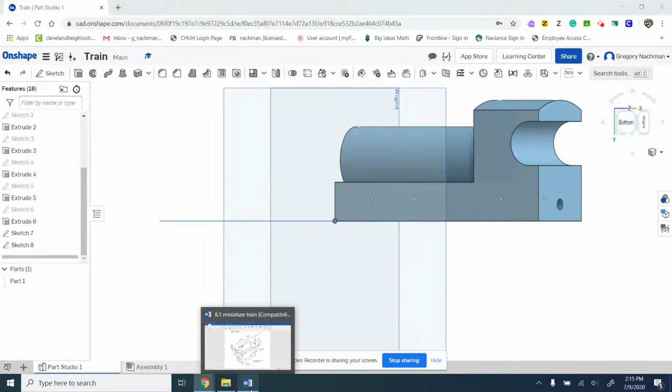This is our third and I believe final video, hopefully if we make it in, of the train body. And what we're going to do is we're going to make the holes.

So there's holes here, and we're going to use the hole feature, and it tells us how big that hole is. 1/4 UNC is the screw type, and it's a threaded screw. So you'll be able to actually put an actual screw in there. It's not just a normal hole.

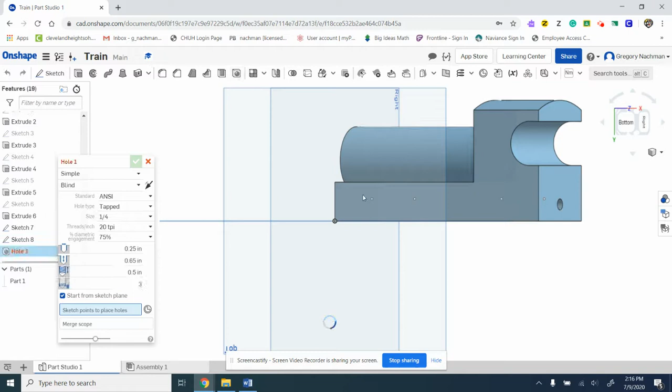So what we're going to do is we're going to use the hole feature, and we're going to click on the 4 parts that we want. And it's nice because if you look next to the cursor, it tells you how many. So there's 4 of them, right?

And we're going to look, it says 1/4 20 UNC. So 1/4 is the size, the diameter of that circle. 20 is how many threads per inch.

And it says in here that we want it to be 0.875 times 4. Times 4 means for all 4 of them, you don't actually multiply it by 4. And if we look, it tells you all those things, right? Like that's how big it is, right?

And it automatically sets it to what we want. Like if you choose a number 6 screw, it'll change the size automatically. So it's really nice, it's a nice feature. We want it 1/4 and the 20.

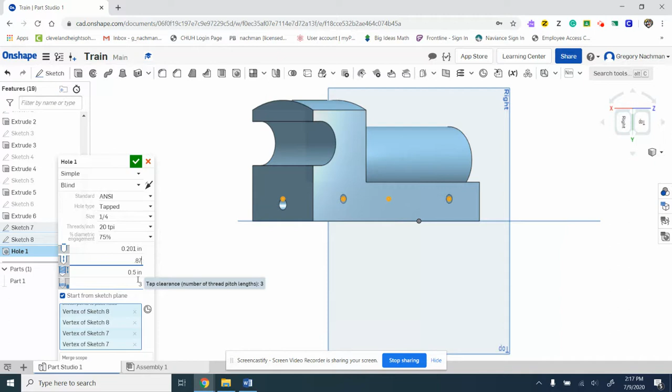And the total depth from there is 0.875. 0.875.

And it gives you the recommended, it automatically fills it in for you. So it's nice. You're able to put it in there, right? We can see all this stuff.

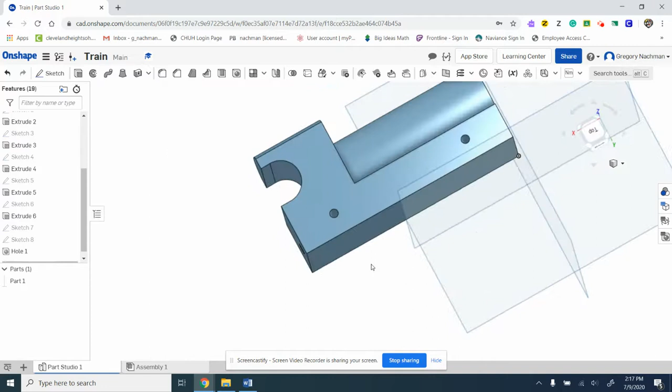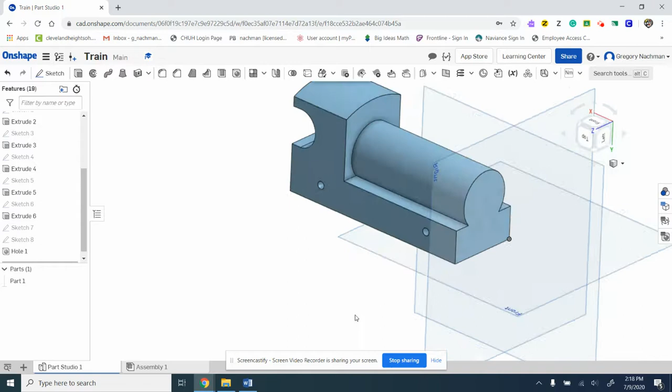And if you want to be able to move the shape like this, if you put both fingers on your trackpad at once and then click on the mouse, you'll be able to turn it, if you're using a Chromebook. If you're using something with 2 buttons on there, you can click on the right and then move it around. It's a really nice feature.

The next thing we're going to do is we're going to put these holes here. Again, this is on the front face. And look how nice that there's these points here. Again, there's a lot of dimensions, but if you start off and focus on one little aspect of it at once, you'll be able to figure it out.

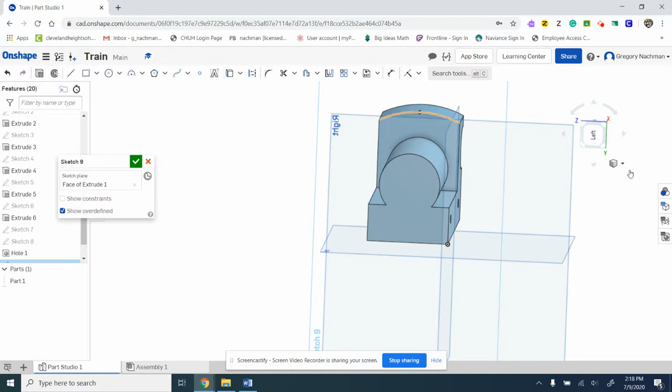So let's make a sketch. And I like to make sure I'm looking at it nicely, it's just my preference, it helps me see. And there's 3 holes, so we'll make 3 points.

And just like everything else, we're going to dimension it. So from here to here, I'm going to look at my drawing. So from this point to the edge, right? Let's look, so from this point to the edge, if I go down, see that's the arrow that points to it. And that goes to the edge. So that's 0.375.

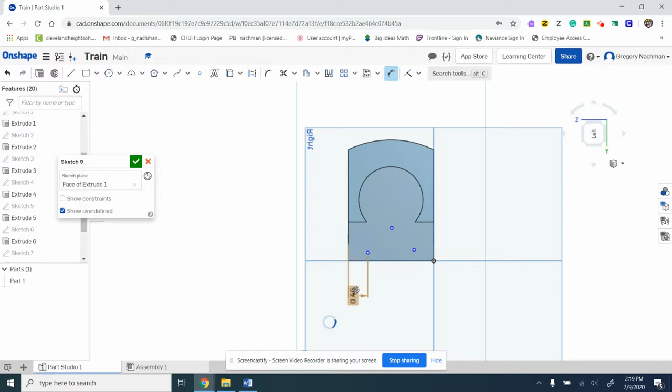Just take a minute, I'm not sure why. And then we'll dimension from here to here. It went crazy on me, which is okay. This is a great thing to see. I just clicked on it and I pressed delete.

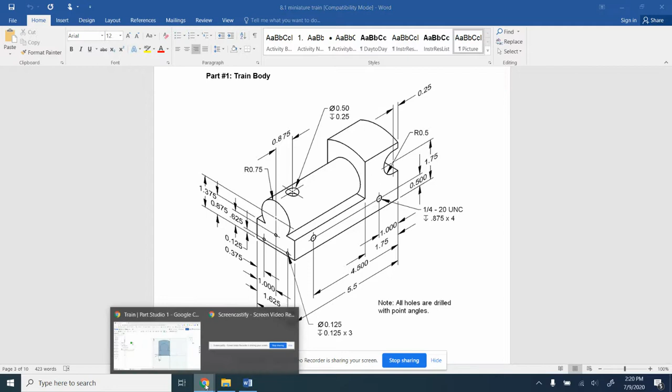And I'll redo it. So I'll press here and I'll press here and I'll drag it out. And then I'll look. Okay, so that's this direction, right? And that's 0.125, you see how those arrows point to that line? So from the bottom to there, it's 0.125. And it's symmetric, so we'll do the exact same thing over here.

0.375 and 0.125. I'm going to guess that this is going to be right in the center. We know the whole thing is 2 - if you don't know that by now, something's going on - so that means that distance is 1.

Let's look to see. From here, I drag my line until there's an arrow pointing. This arrow looks like it's passing through that line, so it's not that one. This arrow's on that line, directly pointing to it. So it's 0.625 from the bottom.

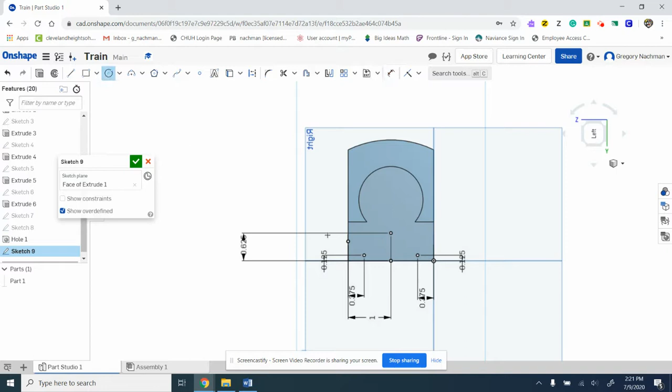Okay, and then there's circles. We could also use the hole feature, but I'm just going to stick with circles. See how this arrow is pointing to it? It tells us it's a diameter of 0.125, and the depth is 0.125. The times 3 means you're doing it for all 3 of them. It's typical.

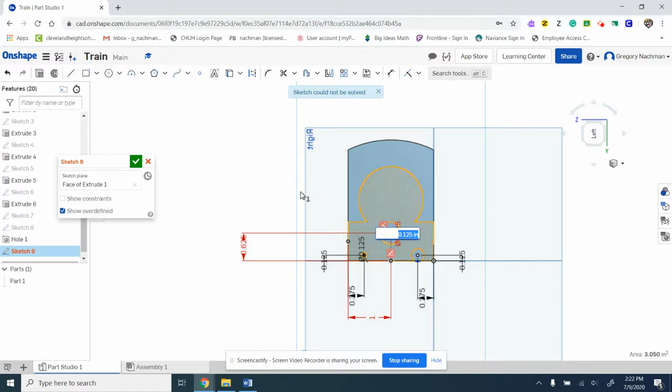So I'll click on that. That's 0.125, 0.125. That didn't like what I did, but I'll double click on it. Didn't like it, so that's okay, I'll just delete it and we'll try it again.

0.125. I'm not sure why that's doing that, but we will fix it.

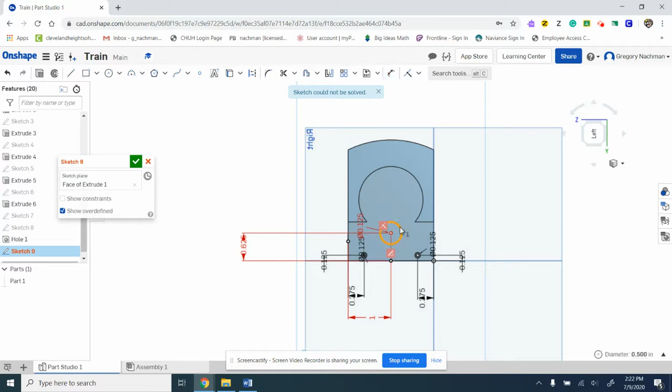I'll just redo that circle. Sometimes when things happen like that, it's okay - you're just going to delete it and start over, and that happens all the time. You don't have to be upset about it. You're like, why did that happen? I don't know. But we could start over, not a problem.

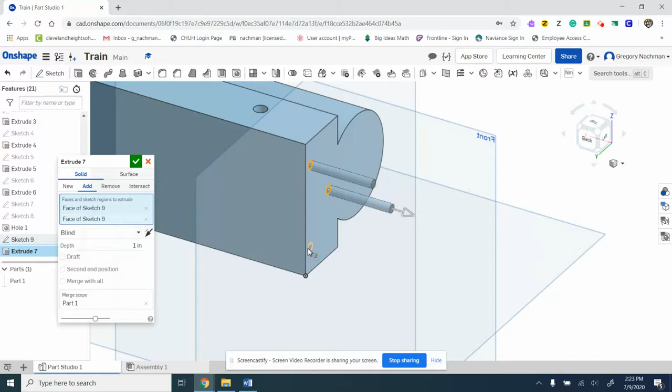So I'm going to extrude it and I want to remove, right? And that's 0.125, which again is that arrow.

All right, and now there's just one more piece to do, and that's the top hole. So to do that, I'm going to - honestly, I don't always remember where everything is at, but that's not it. Let's keep looking, where the plane is, offset from the surface.

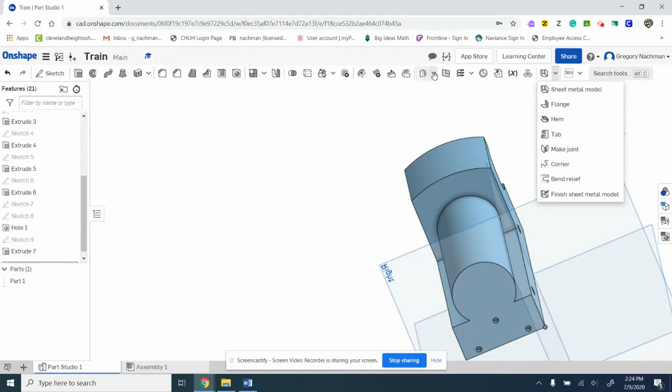So we'll offset. Oh, plane. Sorry, offsetting the plane. And...

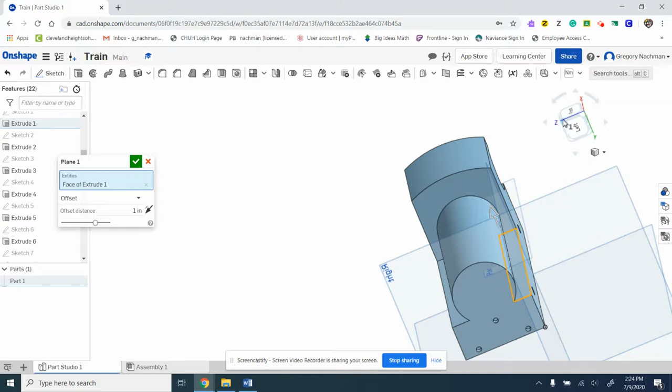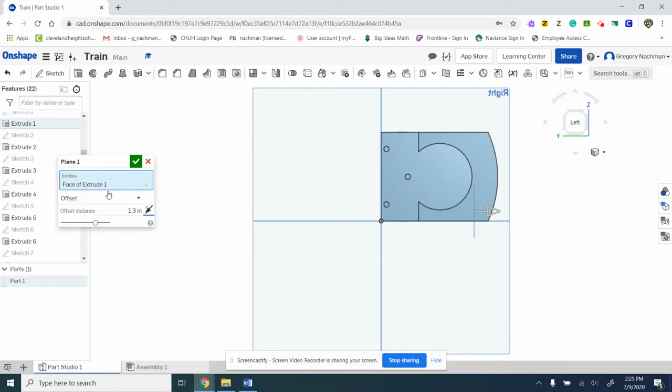I don't really know how tall it's going to be, but I know if I drag it to it, right, I'm going to get it. That's probably about right. If you look, actually, I think it's 1.3. We'll get you to the crest right there. I'm going to press OK, or the checkbox.

And then I'm going to create a sketch. And you're going to have a hard time - make sure that you know. See, that's the plane that I wanted, so I click on it. Just like everything else, I like to really see where I'm at.

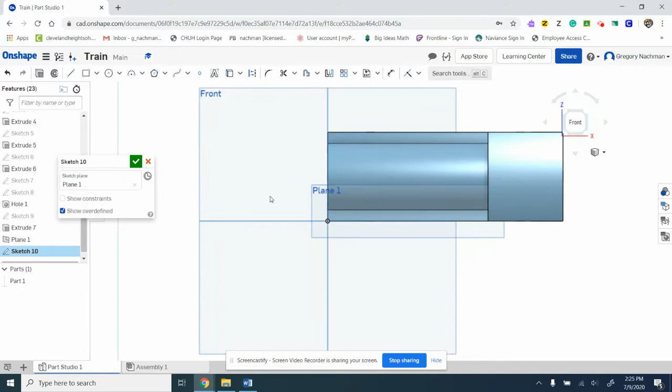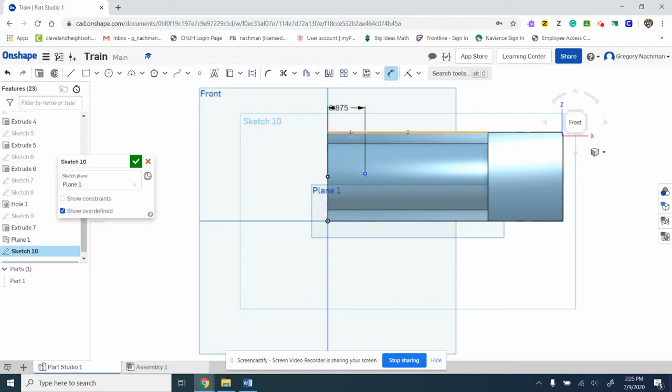Put a point. Every time we do it, we have to dimension - it's never a good idea to just put the point there. And from the back to there is 0.875. So 0.875, and the center of it - we know that whole distance is 2, so the center is 1.

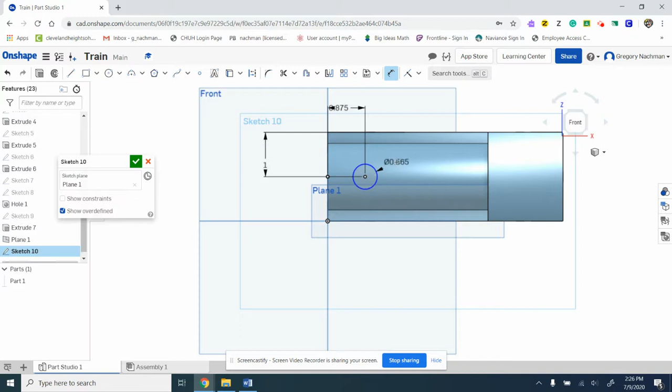And the final thing is it's a diameter of 0.25 and a depth of 0.5. We'll dimension it, 0.25. And then we'll extrude, and we want to remove. And that depth is 0.5.

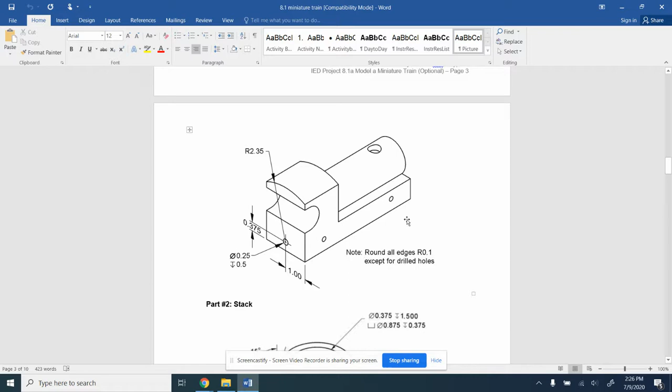Okay, and the last piece that we can do - if you look down here where it says round all edges, to 0.1. So you can fillet all those round edges, or all the edges in general, for 0.1.

The other thing that we should do before we're done is, if you right click on it - we're in Part Studio, Part 1 - let's rename this, and this is the body. It's important to keep track of all this stuff. So that's the body, right? And next time we'll look at the stack.